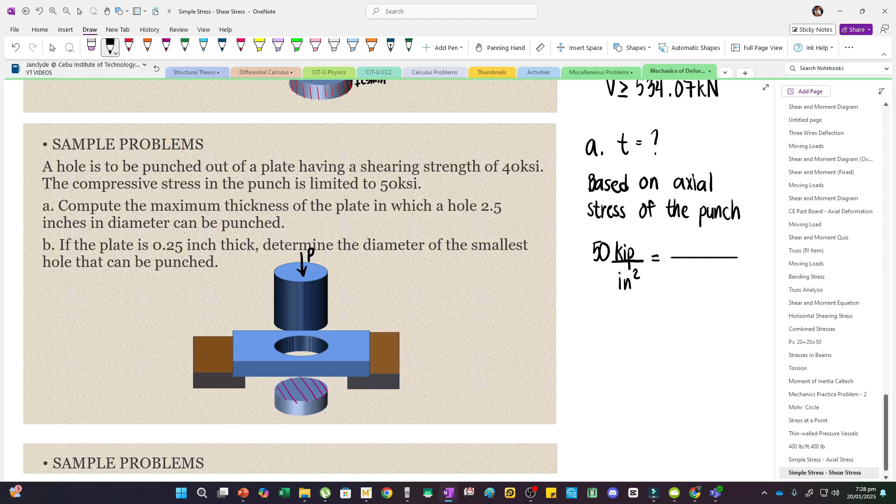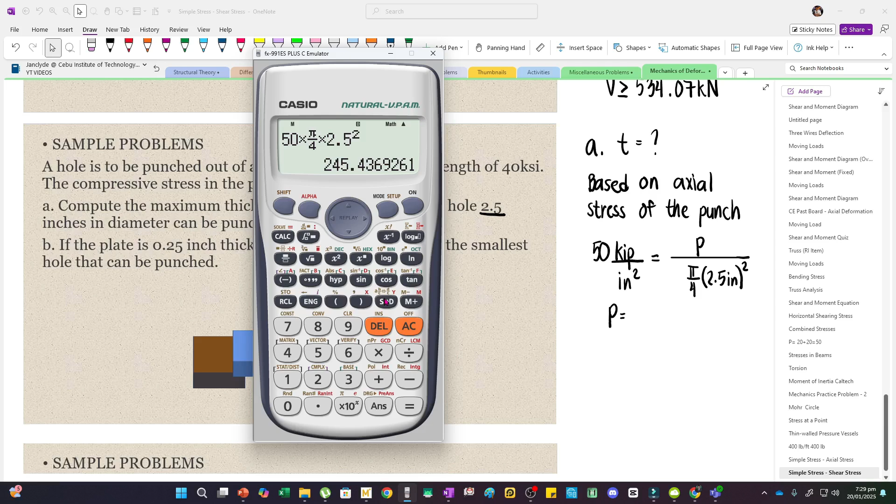So, we have our force P, unknown pa yan, and then divided by pi over 4 times d squared. Yung d is 2.5. Kasi for the first question, 2.5 inches yung diameter ng hole. So, masosolve na natin yung P. So, 50 times pi over 4 multiplied by 2.5 squared. So, 245.44 kips.

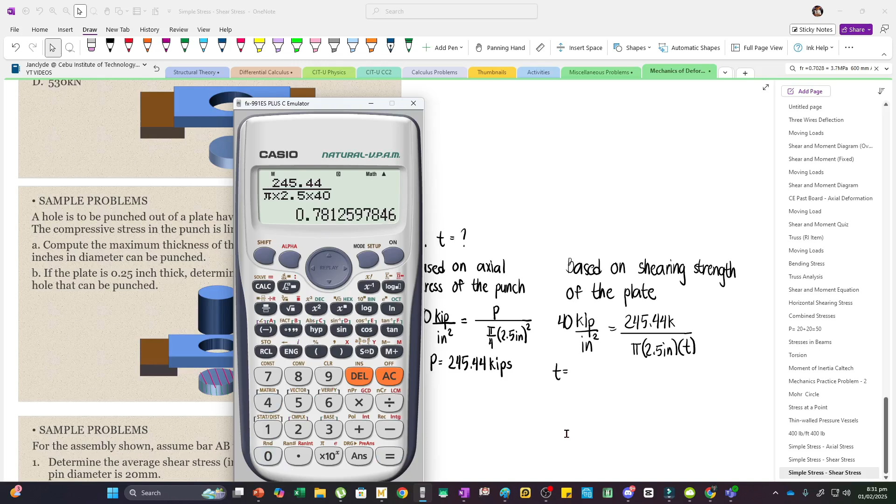Tapos, ito naman yung shearing area for the shearing strength of the plate. So, we have pi multiplied by the diameter, which is 2.5, then multiplied by the thickness, which is our unknown. So, solving T, we would have 245.44 divided by pi times 2.5, and then cross-multiply natin yung 40 saka T. So, we have 0.781 inches. So, this is our answer for letter A.

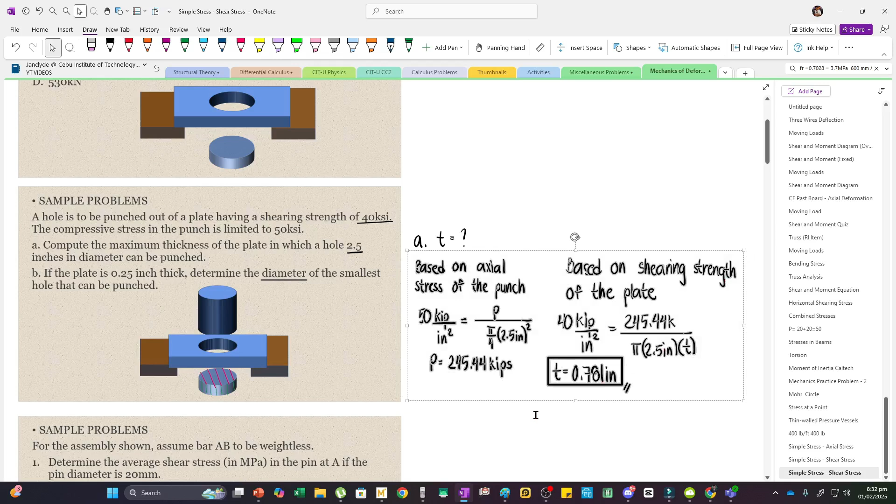Now, for letter B naman, iba na yung hinahanap. Binigay na yung thickness. If the plate is 0.25 inch thick, determine the diameter of the smallest hole that can be punched. So, ito na yung bagong required. So, still, our stress considerations are the same. We have the axial stress of the punch and the shearing strength of the plate. So, yung magbabago lang is this portion.

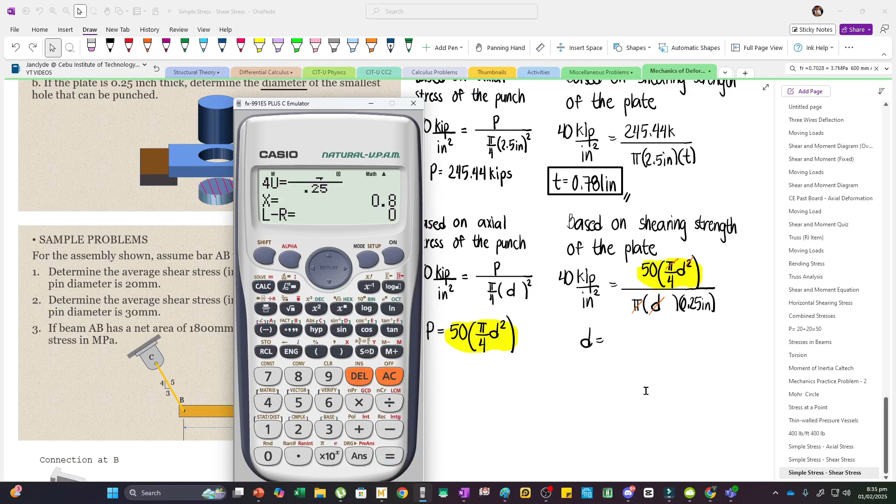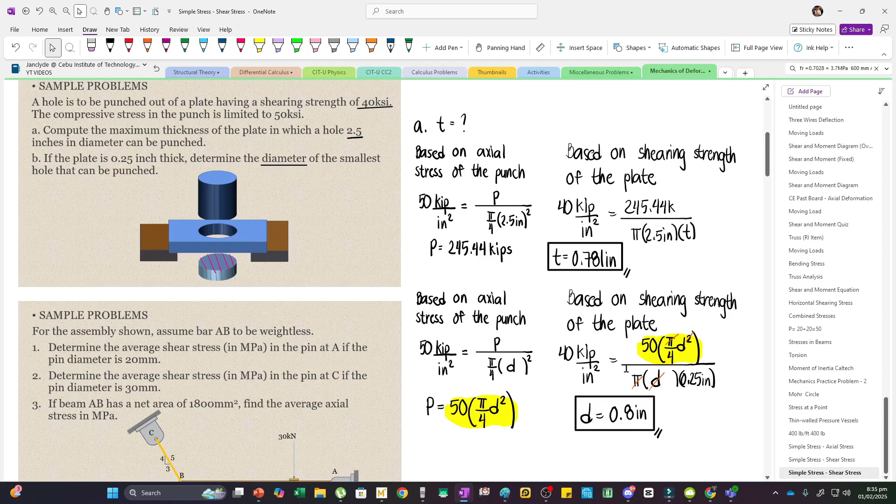We would have 40 equals 50 times, wala na yung pi, so 1/4 na lang, multiplied by d. Then, sa ilalim, we only have 0.25 left. So, solving d, this is 0.8 inches. So, ito na yung sagot for letter B. So, again, kapag meron kang dalawang stress considerations, you would have to use the two para makuha mo yung hinahanap mo.